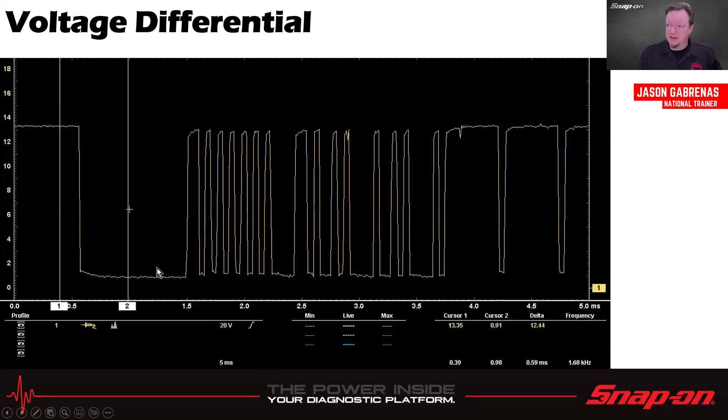It's just a 12-volt range somewhere in between. So we see the delta, or difference between those two, is 12.44. That means it's operating above the threshold it needs to set in order for it to be considered a valid piece of data. And it looks good. This is a known working vehicle, just to kind of capture the pattern of what I would see if I were to hook up on a scope and look at a LIN bus. So this is like 5 milliseconds, and we're seeing a fair amount of data in that 5 milliseconds. But these are the bits and bytes, the ones and zeros that go back and forth.

So LIN stands for Local Interconnect Network. It was specially developed to achieve cost-effective communication for intelligent sensors and actuators in motor vehicles. So to cut down on wiring complexity, they came up with this LIN bus. The Local Interconnect Network bus consists of a single wire with a transmission rate of up to 20 kilobits per second, and it uses a 12-volt differential like we just said.

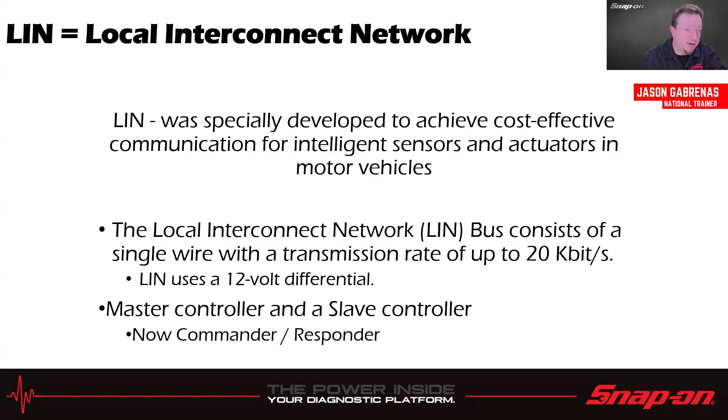It is a master and slave type configuration, so a switch and a motor, that sort of thing. You can have multiple slave modules running off of one master. They're also starting to change the nomenclature a little bit, so you might also hear it referred to as commander and responder, right? The thing sending the command and the thing responding to the command. It's going to be set up something like this. You're going to have your master controller, whatever that happens to be, and then your responding controllers down here. That can be up to 16 total per network.

Master, and then all your other controllers down there. So for example, things where we might see this would be, say, roof and sunroof controls, steering wheel - definitely a lot of vehicles, any of the steering wheel buttons run over LIN. Seat, we're going to look at one here in a little bit, seat position motors, occupant sensors, engine sensors and small motors as well.

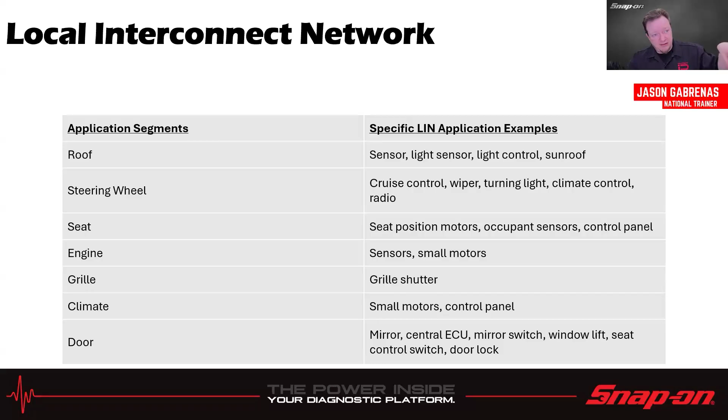Grill shutters, small motors and climate control, like your blend doors and things like that. Mirrors, window lift, seat control switches, door locks, so like your master switch there, that probably runs off a LIN as well.

So let's look at a seat. This is off a Cadillac. Let's see, driver seat adjuster switch. Ground is supplied at all times to the seat adjuster switch. Battery positive voltage is also supplied at all times to the seat adjuster switch through a 10 amp fuse located in the fuse block. When the seat adjuster switches are pressed, the appropriate signal message is sent to the seat memory control module via a LIN message.

The seat memory control module then commands the appropriate seat motor to move in response to the switch signal message. This is for the passenger side, works the same way. And then the lumbar support, if it has that, the seat switch communicates all customer requests for a seat movement or adjustment via the LIN serial data bus to the seat adjuster memory module.

Seat switch making consists of the following controls: a seat adjuster, two-way lumbar forward/rearward, two-way bolsters that can be activated up or down. Manipulating the seat cushion and seat back control bar results in the seat memory control module responding in the same way as if the resultant requests were made by discrete signals instead of the LIN messaging the switch employs. So it's going to look something a little bit like this.

We're going to see the switch send a signal, ones and zeros, bits and bytes, over to the control module. And then from the control module, it will then decide, well, this motor needs to move up or down, this motor needs to move front or back or whatever it happens to be. So the switch sends the command to the module, the module then processes the command and sends it out to whatever motor needs it.

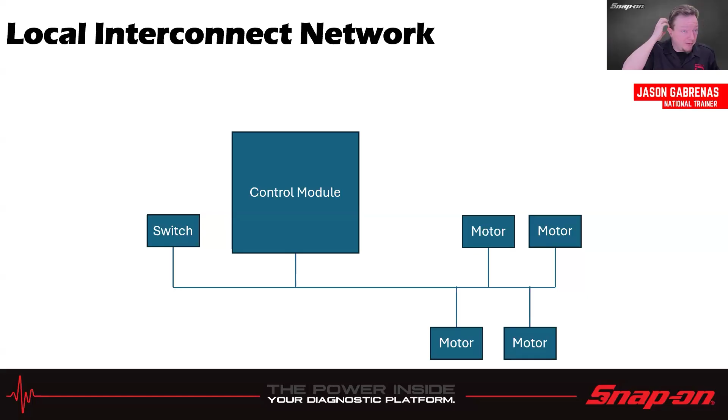I guess it makes it less wiring involved total. We're not dealing with relays so much - I mean, I guess to a point, sometimes we are. But fewer relays, fewer point-to-point wires and things like that cuts down on the complexity of the vehicle on the hardware side of things, I guess. Now, the other side where it might get a little complicated is on the back end with software and stuff like that, initializations and things like that.

All right, that leads me to new module initialization, because oftentimes on a LIN, you need to reinitialize the modules when you replace them, amongst many other things on a vehicle, as we may know. So there's different terms that get tossed around out there all the time, and some of them, more than others, can kind of get conflated with each other. The OEMs are just as bad as the aftermarket with this, confusing the terms, which confuses the technician who wants to work on the vehicle and just needs to know what they want to do.

So if I need to initialize or put in a new part or something like that on a vehicle, oftentimes it needs some sort of a function afterwards in order for it to work - be it a reset, a relearn, a coding operation, a programming operation, or a flashing or reflashing operation. It really kind of falls into these 5 buckets. So let's talk through each one of these individually and define what these terms are so we can understand and talk the same language. So first one's resets - that is the simplest one.

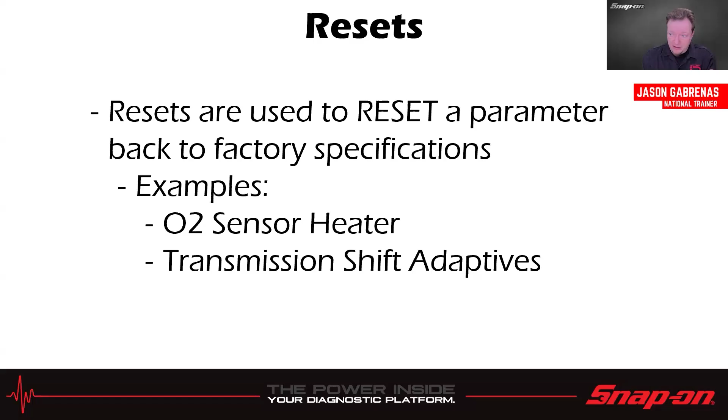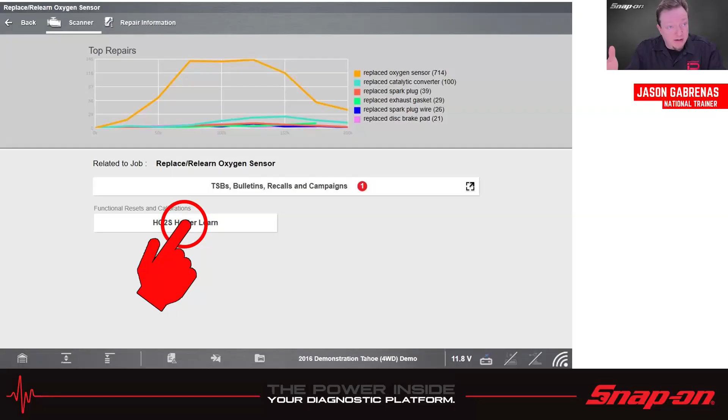So we would need to reset the adaptive. Super simple. In this case, we're on a Zeus and it has service resets and relearns. Those are broken down by job, and it'll pull in any resets or relearns you need. So in this case, replace relearn oxygen sensor will go in there. It gives you any bulletins related, and also pulls back any functional resets, calibration, bidirectional controls. In this case there's only one, but could be multiple depending on what we have, it could be in multiple modules where I need to reset it. And we could go in there and do that, and it would pull that information up for us.

So on the next screen, select reset. It's a simple checkbox on the top of the screen. It's a touch screen, you tap reset, it's done. That easy. Most resets are that way. I'm just resetting it back, wiping out whatever it learned and then just resetting it back to factory stock.

Next one's relearn, so it's a little more complex. Relearns are used to teach the ECM parameters of a replacement part. For example, change the throttle body, the computer needs to know where's full throttle, where's full close, right? Because every single component is going to be a little bit different, even in the tiniest manner, in the tiniest way. It still could be different from part to part, due to building tolerances, construction tolerances, assembly tolerances. So if I replace a throttle body with a different throttle body, it may have different operating parameters than the one that I replaced.

Same thing with valve body learn. If I replace some solenoids, the solenoids might have different characteristics and I need to relearn those. And TPMS, in and of itself, when I rotate the tires and I need to tell the computer, well, it's not on the left front anymore, it's on the right rear, then that learns, or it teaches the ECM where that tire is, right?

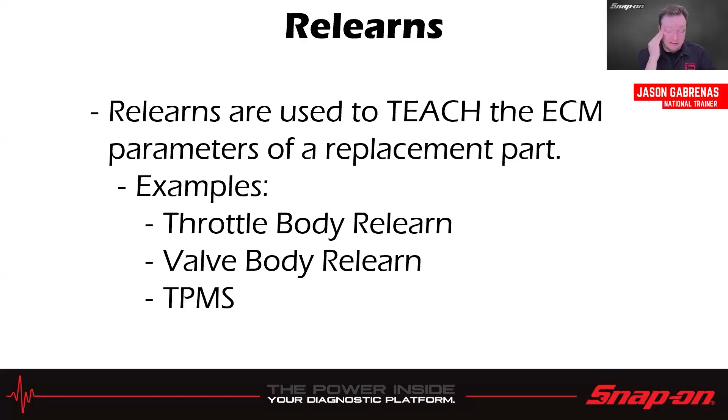So once again, we'll go into service resets and relearns. In this case, we're on a Murano, so that means we probably replaced the throttle body, right? So we have a perform idle learn procedure there, and then we have the idle air volume learn.

Now this one seems to be a relearn that some people struggle with. A fair number of people struggle with it. We get calls on this all the time. Hey, it's not working, it's not doing it right. Idle air volume learning is a function of learning idle air volume that keeps the engine idle speed within a specific range. It must be performed under any of the following conditions: each time the IAC valve, throttle body, or ECM is replaced, or idle speed or ignition timing is out of specifications. Any of those occurrences.

So we got to put it in the right mode first. Accelerator pedal release position learning: make sure the accelerator pedal is fully released. Switch on for 2 seconds, off for 10, on for 2, off for 10, hit continue.

Throttle valve close position learning: make sure the accelerator pedal is fully released, on for 2 seconds, off for 10 seconds, and then make sure that the throttle valve makes a sound when it's at the off position.

Because here's the thing with relearns. Relearns oftentimes have many parameters that need to be met, and if they go outside of those parameters at any time, it will cancel. Sometimes it'll tell you why, sometimes it'll tell you the parameters you need to hit, sometimes it won't, it'll just say conditions not met. And anytime it says conditions not met, like on a GM vehicle, it's the car telling you that, not the tool. So the car says, oh, the temperature is not right.

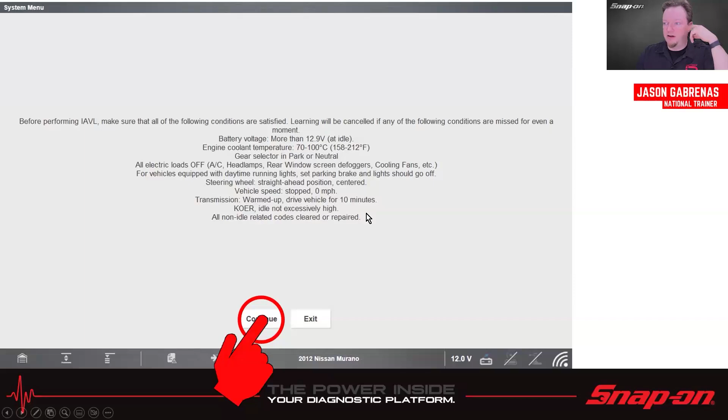So for example, before performing this, make sure all the following conditions are satisfied. Learning will be canceled if any of the following conditions are missed for even a moment. Battery voltage more than 12.9 - for some reason it drops to 12.8, done, start over. Coolant temperature 70 to 100 Celsius - gets to 101, forget it, start over. Gear selector in park or neutral, all electrical loads off, vehicles equipped with daytime running lights set the parking brake. Steering wheel straight ahead position, centered, don't touch the wheel. Transmission warmed up - drive vehicle for 10 minutes. Key on, engine running, idle not excessively high. Non-idle related codes are cleared or repaired.

So if all that is set, select continue with the key on engine running, and it'll do its thing. It'll go through the test and give you a pass or fail at the end. Or if one of the conditions goes out, it may throw an error, and then you just have to start over again.

Next one is coding. Coding is used to teach the ECM parameters by using a code number. Some examples you might have seen before is fuel injector coding. Many vehicles, especially direct injection vehicles, have a code, like a 16-digit code or an 8-digit code or whatever, on the top that will tell the computer here's what my flow rate is. Because once again, manufacturing tolerances vary from piece to piece, so it might flow a little bit different. So you got to plug a number in, and that goes into a table, and the computer calculates.

Another one that's somewhat common is Proxi alignment. So that came over when Fiat bought Chrysler. There are Chrysler, Dodge, Jeep vehicles that need this, usually the ones with the Fiat stuff in there. But Proxi alignment...

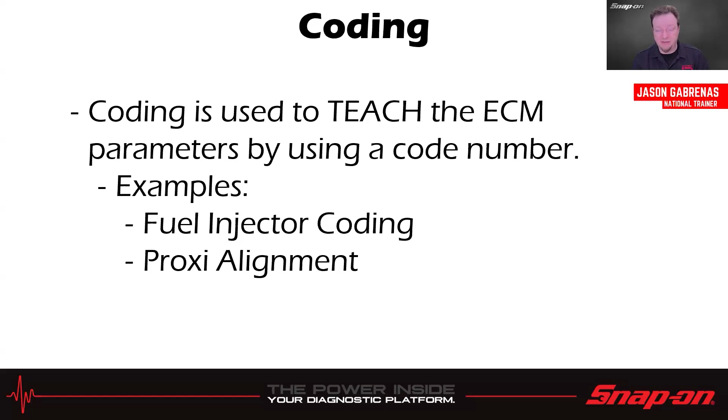On, say, this Fiat, 2013 Fiat - the body control module stores and compares vehicle configuration data with the instrument cluster as well as with other electronic control units in the vehicle. This process is referred to as programming of configuration of systems integrated, proxy, also known as proxy with an X. If a configuration mismatch is detected, the BCM sets a code. Configuration mismatch code will require the performance of a restore BCM proxy configuration routine or a proxy configuration alignment routine using a diagnostic scan tool.

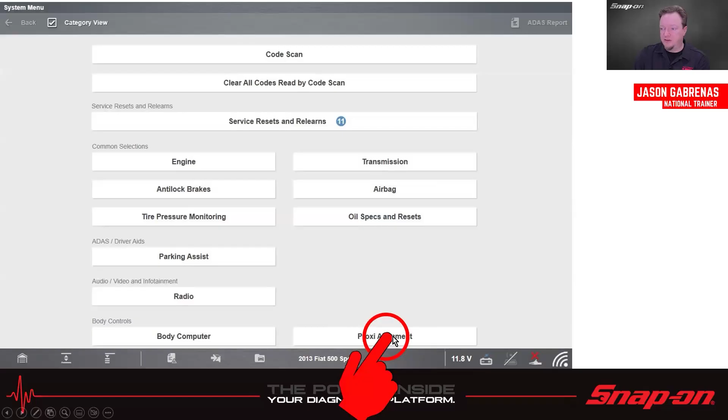So we'll see what we would need to do with that. We can go in here, and it's actually its own selection - you don't even have to go into the BCM. You just go to Proxi alignment and then perform Proxi alignment procedure. Procedure is used to display the proxy configuration status of the entire vehicle and copy the proxy configuration data into any required ECUs. Press continue to display the status. So in this case, 2 of them are unknown, 2 of them are all set. We'll hit continue, it'll copy and paste the information that it needs across all the modules, that way everybody's talking. And it says to complete the process, turn the ignition off and wait for the display countdown to finish, and then it'll be finished.

Easy enough. Now we get into where it's a little more foggy, starts getting a little more foggy when it comes to programming, right? Because you might think of programming as what the next thing we're going to talk about is, and sometimes OEMs call it that too, but for our purposes, it's not. So programming is used to change the ECM parameters based on a preset table, most commonly found in BCMs, body control modules, but can be found in any sort of module really, depends on the vehicle.

But all doors unlock with a fob - so when I press my key fob once, I want all the doors to unlock, or I just want one door to unlock. Do I want it to answer back when I press the button or not? These are different parameters that can be programmed.

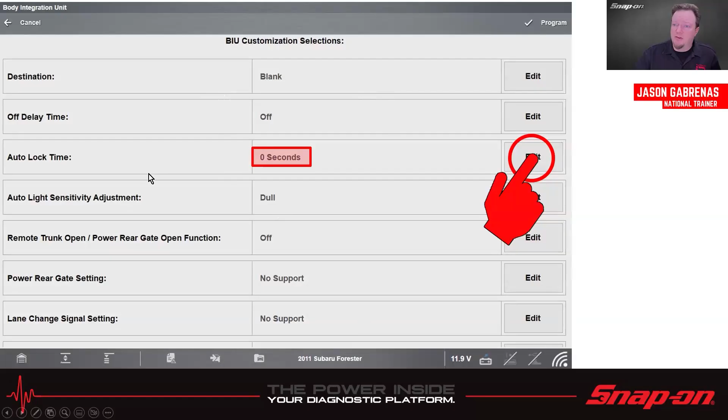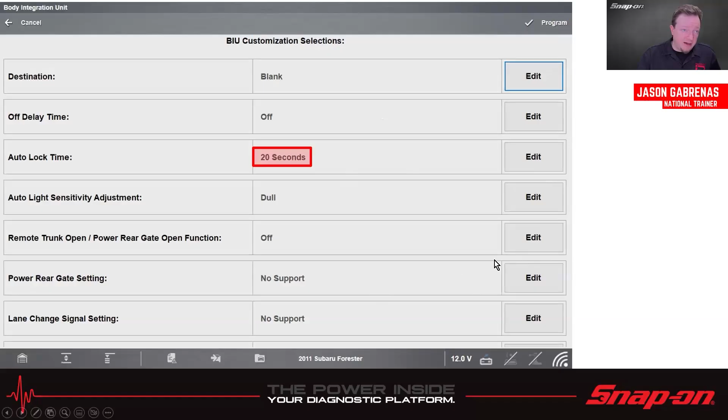So in this case, I'm on my Subaru. I'm going to body integration unit, which is what they call the body control module. I can change a whole bunch of things - auto lock time's one example. Hit edit, I can go anywhere from 0, 10, 20, 30, 40, 50, or 60 seconds. Let's choose 20, and then we'll hit program. And then it goes to this menu - you could do other selections at the same time if you wanted to do that. Then we hit program again, and it programs it into the vehicle. That's programming.

Lesser known, or commonly confused with flashing - flashing or reflashing, depending on the operation, is used to write software in the ECM. If I replace a PCM on a Jeep, it ships blank because it's used across a bunch of different models. It's blank but needs software to run. All the chips are there, but there's no code. So the process of flashing the software to the chip is where that term comes from.

This comes from way back, the 80s, maybe even the 70s. I don't remember exactly how far back, but it's called flash ROM - the chips are called flash ROM. You would flash the software onto the chip, and if you needed a software update, which the OE would call a software calibration change, you'd re-flash the chip, putting new software on top of what already existed. That's the process.

Now, what do I need to do this? Well, I'm not doing it with an Android tablet, that's for sure. It has to be a Windows PC, because no manufacturer out there says you can use anything else - they specify Windows, all of them. So I need a Windows PC. Can't do it on a Mac either.

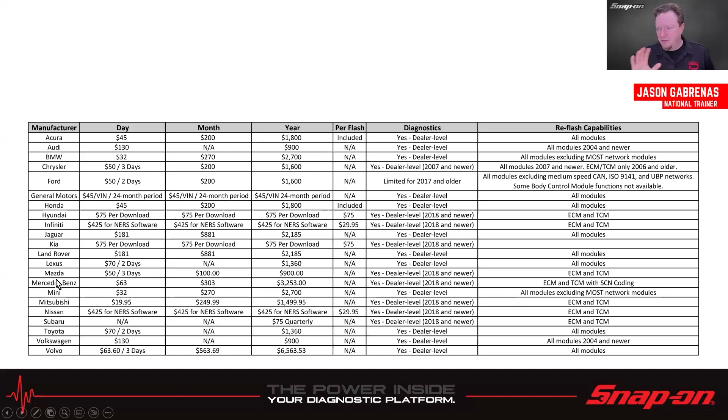Same with BMW, $2,700 a year. Volvo's out of their mind at $6,500 a year - that's crazy, they're by far the most expensive one on here by a large margin. But they're cheaper for the day rate, so it's kind of weird how they do the math. But yeah, you would need a subscription to whatever manufacturer you wanted to do a flash on.

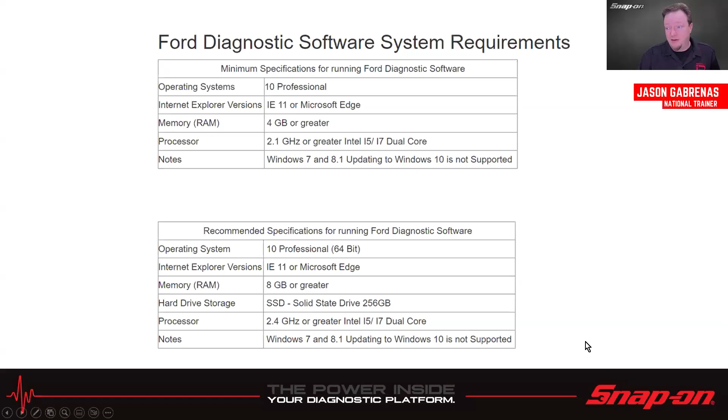So Mazda and Ford don't play nice if they're installed on the same hard drive. If you install both applications on the same place, they will corrupt each other and neither will work. So you need to either partition a hard drive, or do separate hard drives, or separate machines.

I know some people that at least used to flash, I don't know if they still do, but they used to have 3 different laptops - a domestic, an Asian, and a European laptop just because of the different software requirements. I believe it has gotten better because it used to be like, oh, you need this version of Adobe Air for this manufacturer, and this version of Java for this manufacturer, and a different version of Java for a different manufacturer, and they would only work for that version too.

So I think they've gotten better as far as those aspects, but it's complicated. There's a lot of stuff to research, a lot of stuff to read. You don't want to brick a module by accident.

So we do offer help in this realm. It's called a pass-through assistant. It's been out for a few years. It will allow you to remotely flash vehicles. So you can set up an appointment, they'll call you, you plug into the vehicle, and then they'll take care of the rest on their end.

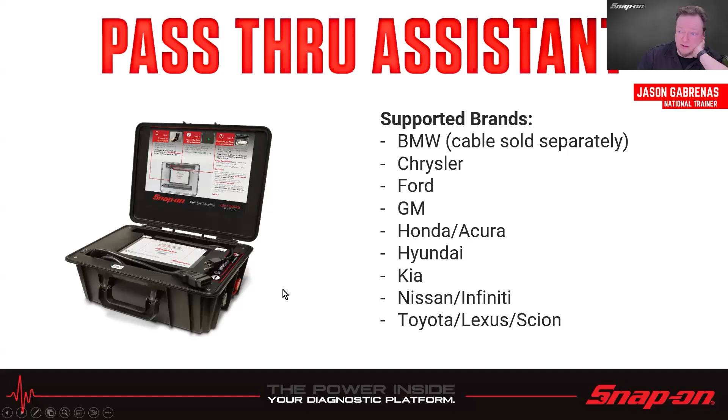So these are the manufacturers that are covered under that. It's got a Windows 10 tablet, it's got a pass-through underneath, it's got the cable to plug into the car, cable to plug into the wall. Also has a battery maintainer in there as well - you just use jumper cables off the lugs right there, and that maintains the battery. That's 90 amps as well.

Also added recently in the last couple of years is this repair guidance to it as well. So one box, they all got updated once this came out. And repair guidance is nice because that is the phone a friend - say you don't have an A-Tech in the shop, or your A-Tech has just got one that's really kicking their butt, and they're at their wit's end, they don't know what to do.

So you can call them, and the appointment gets made through the box. They will give you a prescription plan, a plan to go and fix this, whatever, for $50 for 2 weeks on any VIN. They will stick with you until that car is fixed, or 2 weeks is up, and then you just pay again and continue. So it's $50 for 2 weeks to have an A-Tech with you. That's a pretty smoking deal, if you ask me.

But they do have OE trained, brand specific master technicians on the other end of the phone. And you'll say, okay, well I did this and this, and these are the symptoms that I have. And they'll say, okay, well...

Examples that I've heard talking to these people - it's like, oh yeah, they had this common problem that I'd seen 1,000 times. So I just said, oh yeah, go over to the floor mat, pull it back, and there should be a connector under there, look for water intrusion. Sure enough, there it was.

So if you work on the same vehicles over and over and over again, I would suspect after a while you learn what the common problems are, or the common failure points where the OEM doesn't think it's a problem, but I've sure seen 200 of these in my lifetime or whatever. So that's the kind of people on the other end of the phone - the super techs, factory trained master techs who know what's going on out there, what they've seen in the field.

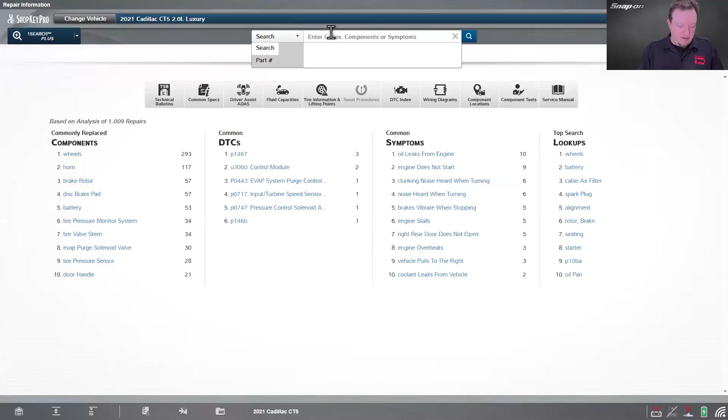And if we look at the wiring diagrams, scroll down a little bit. There's a bladder control module. That's for the lumbar adjustment, right? Let's see, driver seat adjuster switch, and then there's the memory module, right?

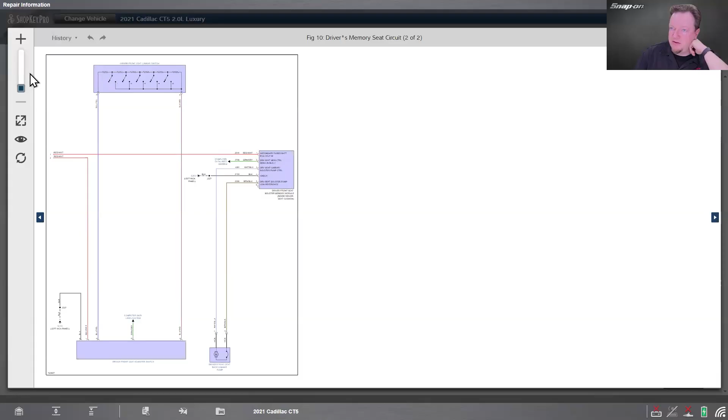So this is what we were talking about before. It sends a signal over LIN, so this goes out to the computer data line, and then it goes back over here to the memory control module, and then it says, all right, do what you need to do, right? Moves the motor, or in this case, there's a lumbar.

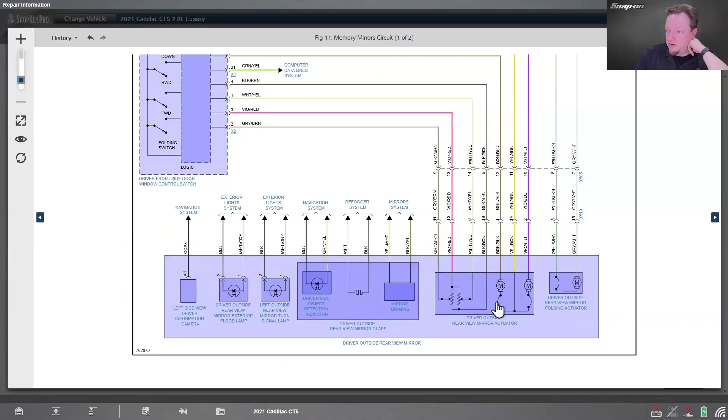What's this one? Driver front side door window control switch, right? So that has a bunch of switches with a logic board, and it has a LIN bus that sends stuff out. Operates the mirrors and the mirror glass and all that good stuff. So all sorts of different things run over the LIN.

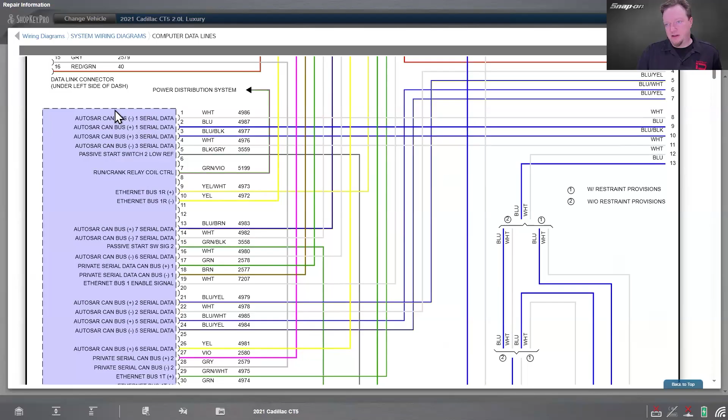Now, how do I know it's on LIN? Other than it was labeled on those diagrams, but if you have ShopKey Pro, you go into the wiring diagrams, there's a computer data lines section, which will have all the data lines listed. Now, in this case, this is the gateway module, so it's got Ethernet and CAN bus and all sorts of stuff. No LIN, though, in that case.

But if I go to the next page, there we go. This is the driver seat adjuster memory module again. And you can see it has multiple LIN buses on it. So that's LIN bus 1, LIN bus 2. It's got these two things, driver's front seat adjuster switch. So that is the seat adjuster switch. Sends the signal down here into the module. Then the module sends out its stuff to wherever else it might need to go, right?

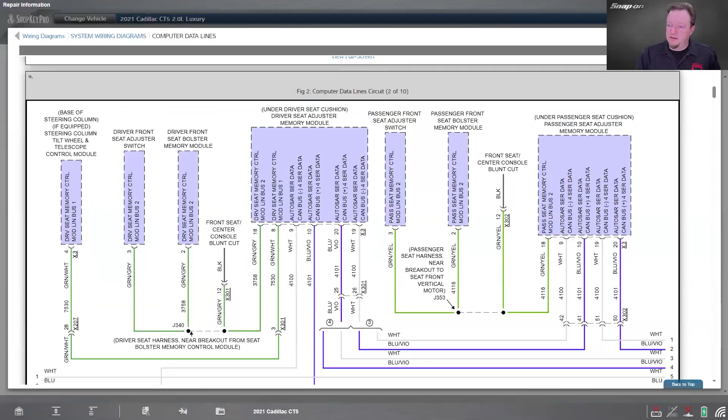So these are just the data lines. Obviously, doesn't consist of all of the connector or the pins in the connectors, right? So that's one quick way to know if it is. Oh, I didn't want to get out of the vehicle.

Activate again. And if we go on the scanner, there's multiple things we might need to reset or relearn. So if I go into the resets and relearns menu, service resets and relearns, we can do: I need to reset the oil, calibrate the front camera for ADAS, transfer case adaptives for all-wheel drive, bleed the brakes, that sort of thing, all in there.

If I go into the engine and just go into the functional tests themselves under special functions, there's a separate learn and reset section. This is not necessarily unique to this vehicle, but you wouldn't find that necessarily on every vehicle. That's up to the OEM on that one.

Let's see, air cleaner monitor set. Let's see, ambient air temperature calculation reset, right? So if I replace ambient air temperature sensor, I can reset it here. Brake pedal position sensor learn. There, we talked about that before, right? So you have to learn it in the engine and inside the body control module.

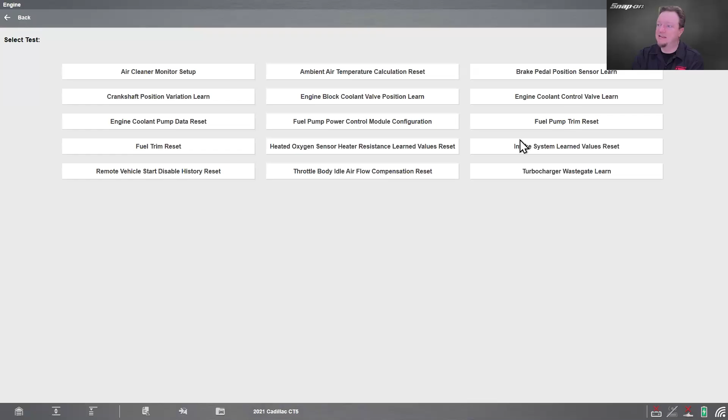Engine coolant control valve learn. Fuel trim reset. So these are relearns. These are resets, all right. So all these different things you might need to do on that particular vehicle. It's a Cadillac.

Next, we'll go to a Ford Bronco Sport. This one has a unique test in there just for the LIN bus, and it's in the body control module. So right there.

And we'll go to the BCM, functional tests, special functions, and then you can see we have LIN new module initialization right there, right? So the procedure will configure all BCM LIN nodes such as the rear view camera, intrusion sensor, rain sensor module, and battery monitoring system.

After you select OK, some nodes might go into config mode. Hit continue, turn the switch on, continue. It's going to count down or count up for about 15 seconds, and then probably another 8 seconds after that, and then it'll be done. So it's just sending the signals, making sure everything gets reset, relearned.

And now, done. Procedure successful. Not every vehicle you need to do that, but in this vehicle you do. This one also has a battery monitoring system reset, to reset the battery monitoring system, and TPMS, which would be a relearn, PMI.

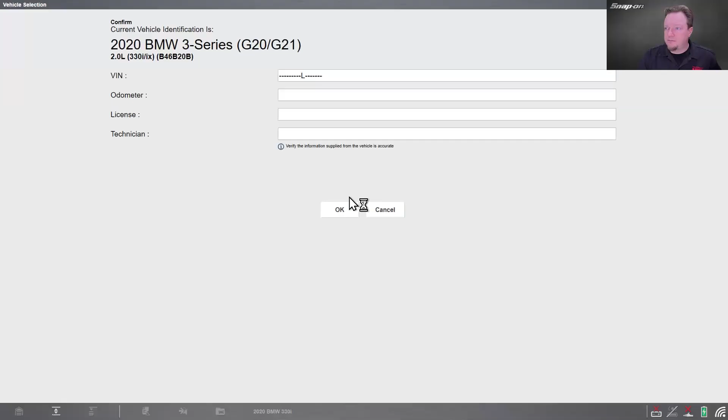And then lastly, I want to go into this BMW because there'll be a unique one in there. So here, pull up my service resets. There's 60 of them on this vehicle.

One good example is like replace battery. Oftentimes European vehicles, you're going to need to recode the battery to the vehicle. So in this case, we get a little top repairs, we get some bulletins related to battery, and then if I hit functional resets, it's going to go to battery replacement.

So I can come in here, display distance reading at last battery exchange and the one before last. Register the battery exchange or end the service function. So if I hit register that, change the battery. Correct charging operation - the replacement battery must be the same capacity and type as the original. See display history for current battery and type, and then it tells you how to recognize some of the batteries.

It's going to be programmed in the next step. Can't be canceled after starting. Goes in and resets it. Easy enough.

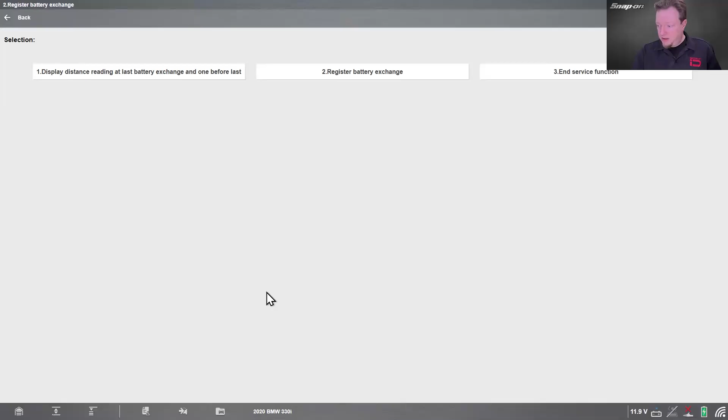Another place where this could be helpful with the service resets - we had somebody call into our customer care one day. We were listening into the call, and they said, 'Oh well, why doesn't your tool do battery registration on this Volkswagen? I've done it a bunch of other times on Volkswagens. Why doesn't it do it on this one? Doesn't even have it listed.' Sure enough, it wasn't where they thought it was, which they thought it was in the engine. That's fairly common for it to be in the engine module, but on this particular vehicle, it was in the gateway module.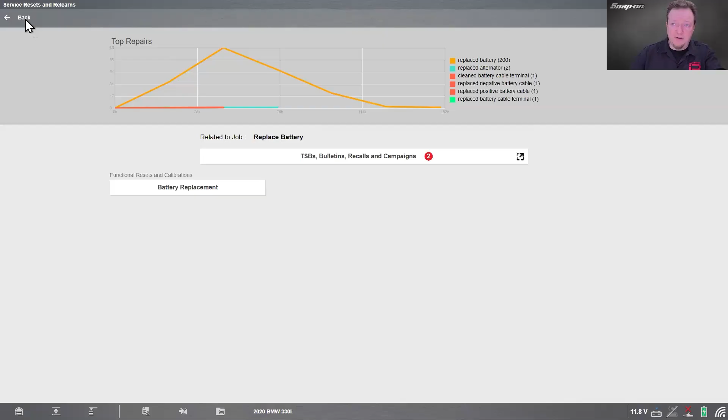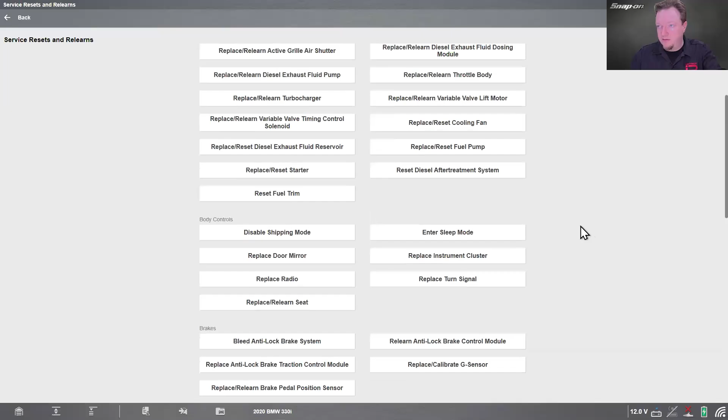So they would have had to go into the gateway module to do it. If you use service resets and relearns, it doesn't matter what module it's in. You just hit replace battery, you pull up the functional reset, and wherever it's hiding, it gets pulled up out of that module. So that's a pretty handy tool. Depending on how complex the vehicle is, some of it's pretty straightforward, but some of it's not. So a lot of different engine resets down here, like replace turn signal - I might need to do a relearn on a turn signal or something because the resistance changes or something like that.

So it could be quite helpful to you if you just pop in there and say, hey, what have I done? What job did I do? Do I need to bleed the brakes? I can go in there and do the bleed the brakes. Replace or calibrate the G sensor - whatever it might happen to be, I can go in there and see if it's listed. And if it is listed, then I'll have the test available, instead of having to search in which module it's in out of the 50 modules on the vehicle. It just pulls that learn on you. So that is both LIN Bus and module initialization.